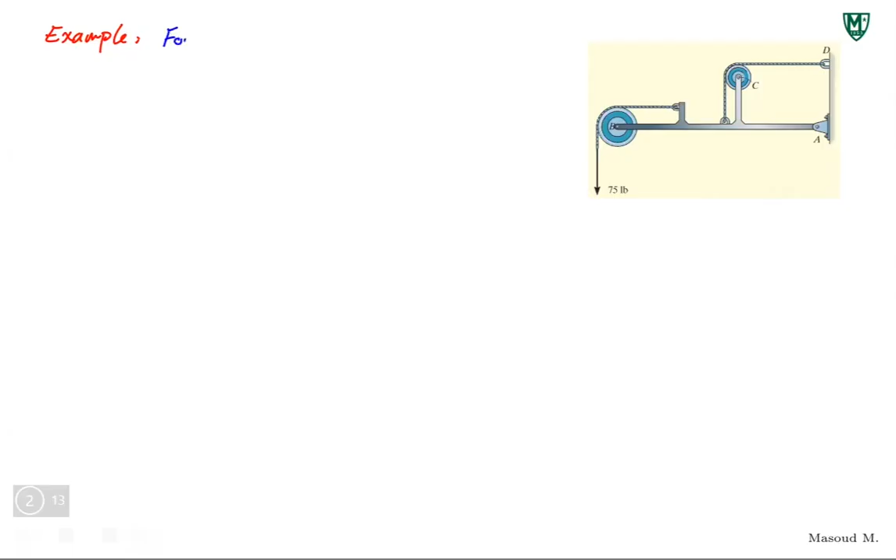We have a system of pulleys. We have two pulleys and a frame. It's generally a frame. Let me just write the problem statement. And I want to look at the free body diagrams for the whole system and each part separately. So let's just phrase it this way. For the frame, and it's not moving, so we can probably easily guess that's a frame and it's not a machine.

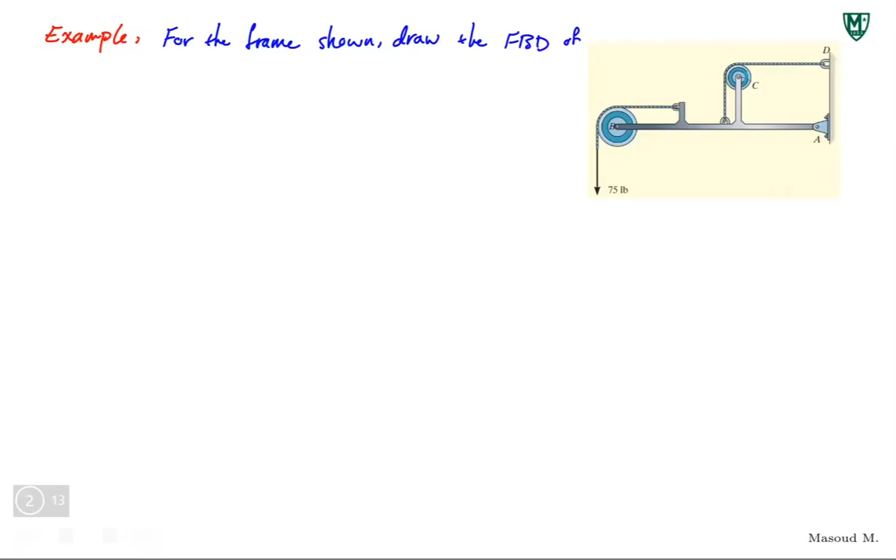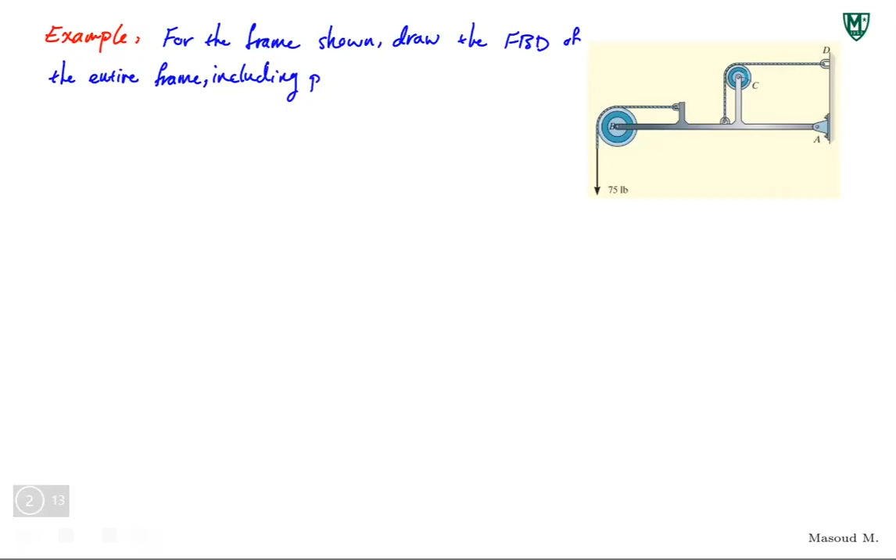Draw the free body diagram of the entire frame. So that's one thing to do. First, draw the free body diagram for the entire frame, which, let me write it fully, including pulleys and cords.

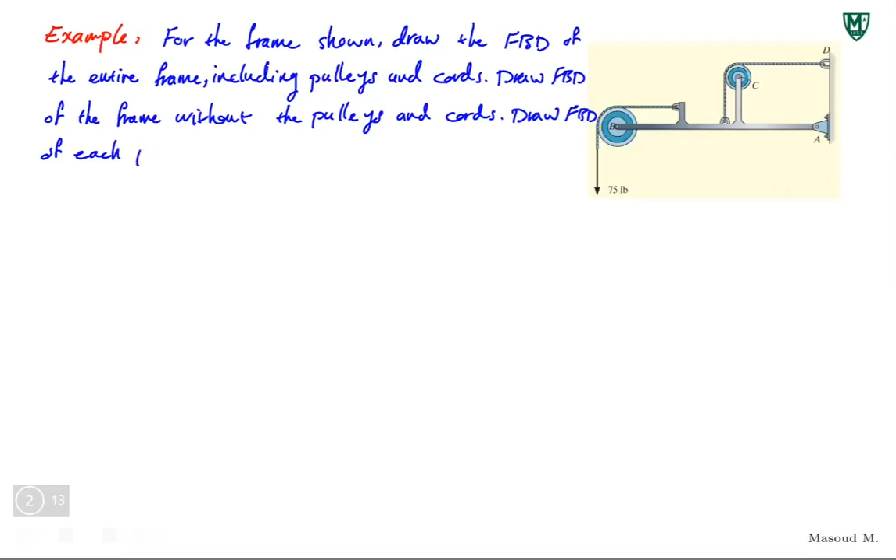Second thing is draw the free body diagram of the frame without, I think that's what it says, the pulleys and cords. Exclude those. And finally, draw the free body diagram of each pulley. Right. All right. To start from the first part, draw the free body diagram of the entire frame.

Let's draw it. I'll do my best. Let me do it here. So this is the frame. Let's say I have this one right there. I have this one right here. It includes everything. So let's just assume that this is the pulley as good as I can draw it. And that is not the pulley. Pulley is supposed to be here. There we go. And the other pulley there. I can move this one way or another, hopefully, or I can't, and I just move it this way. As much as I can do the trick. There you go. All right.

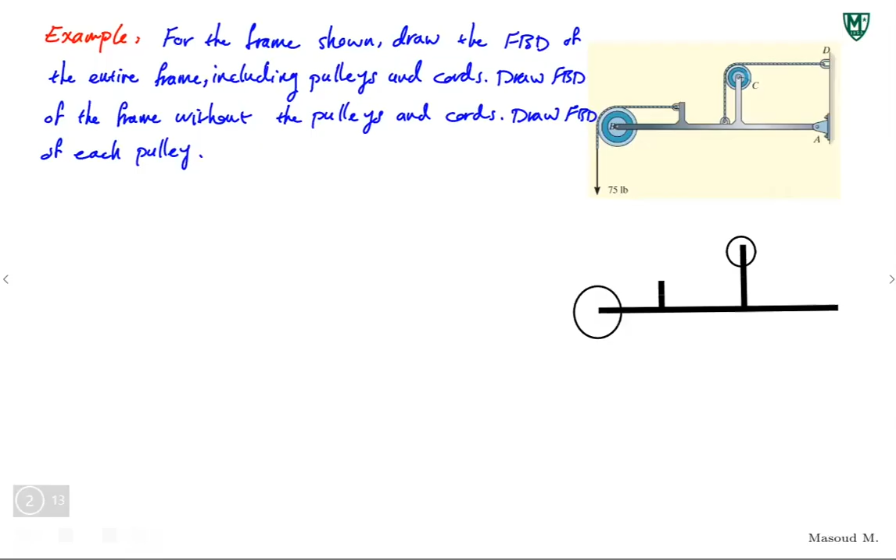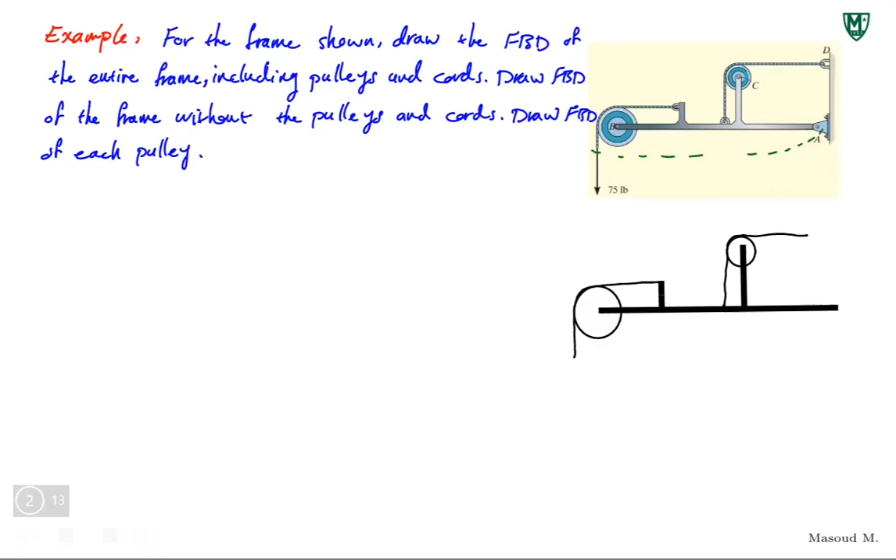All right, free body diagram for this, right? And we have the ropes there. So we're taking into account the whole system. So I'll draw it like this right there. And draw it like this. But keep in mind, I'm isolating the whole system. So whatever this line cuts has to be taken into account. All right. So what do we got there? We have the tension on this cord. We are given that it is 75. Let me use the proper color. 75 pounds.

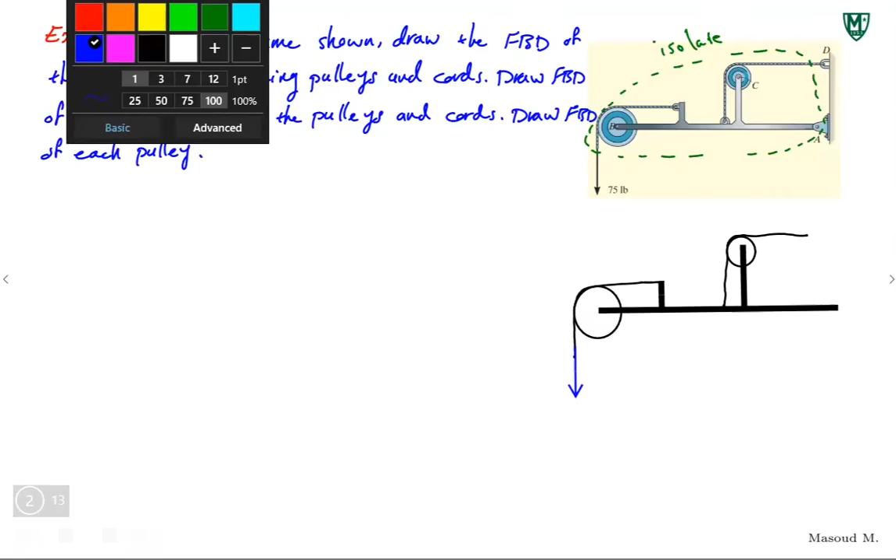What else do I have there? Can someone tell me at least one of the support reactions? Thank you, Colin. Exactly. We have support reactions there. And I'm just going to choose some arbitrary direction, just positive, since we don't know about these. That would be AX, and this would be AY. Anything else? Tension on rope attached. Exactly, Daniel. So we have the tension on the rope. There you go. And let's just call this TD. That's pretty much it. That's all the forces that I could see when I isolate the whole frame and draw the free body diagram. So this would be the free body diagram for the entire frame.

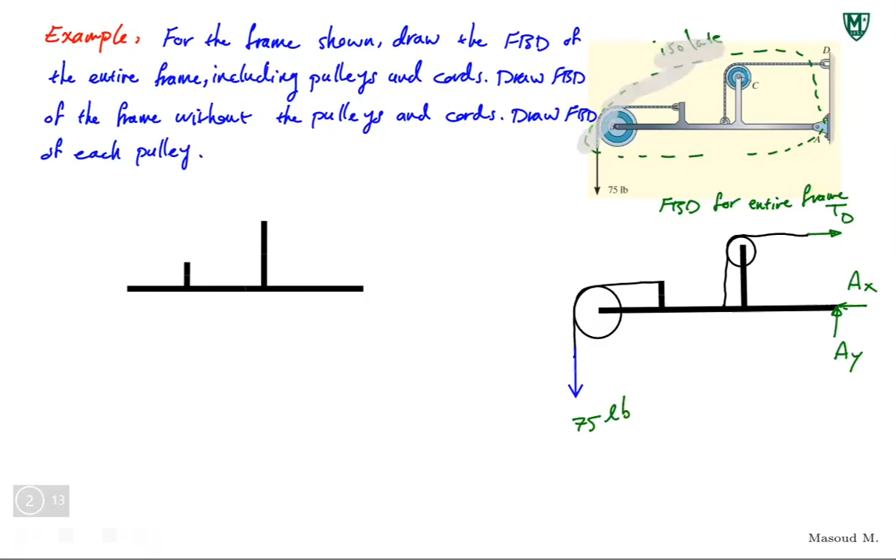Right. Let's go to the second part. So draw free body diagram of the frame without the pulleys and cords. All right. Let's see how does that work. I'm gonna draw the frame somewhere right here. Right, I have this one, and I have this one. All right, so now I'm looking at this frame. If you think about this frame composed of this metal part, that is the whole structure there attached to each other, this part, and this pulley there, and the other pulley here. Right? I'll take these pulleys apart, aside. I don't want them in my free body diagram. I want the free body diagram for just this green part of the frame. This structure that is basically welded and attached to the wall. So this is what we're isolating now.

Let me see if we can do it this way. This is what I'm isolating. All right. Now, what do we have there? Well, I already know that I have support reactions. That hasn't changed. So I'll just put them again here, AX, AY. Remember, this is a frame, so I can dismantle all the parts and look at the free body diagram of each part separately. And each part should be in equilibrium. Later on, we'll see how you can use it. But in this particular problem, I'm just interested in knowing the free body diagram of different parts. And in this part of the problem, the free body diagram of this green frame. So I have the support reactions at point A.

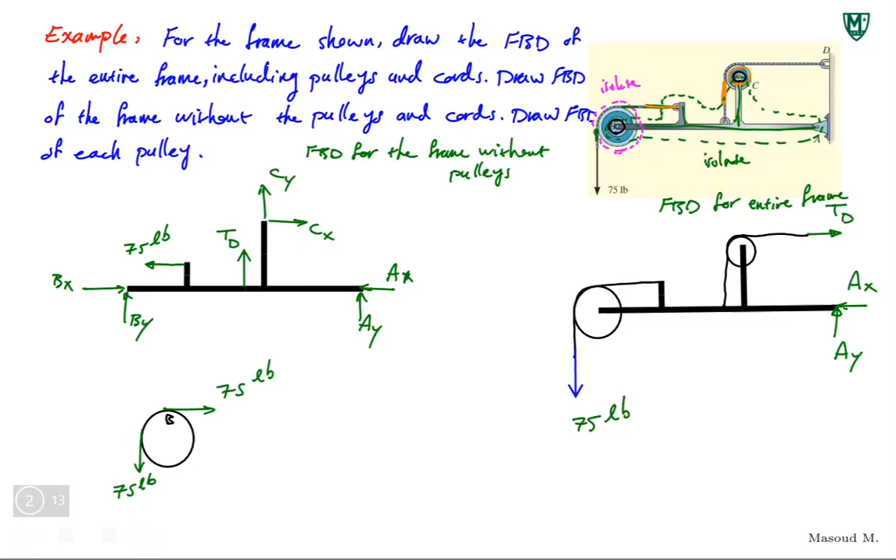If I do that, I'm taking it out. Right? Well, obviously, the rope is there. Pay attention, the rope is cut in two parts, here and here. So both of them have to be taken into account. Downwards, yes, exactly. One downward, 75 pounds, and one in this direction, 75 pounds. Because I'm isolating just the pulley, so whatever that line goes through and I cut through it, it has to be presented on my free body diagram.

Another thing is point B, right? Before I took this pulley out and I looked at the frame, now I'm going to put this pulley out and I just look at the pulley itself. Now, since it's at point B and I already put BX and BY on the frame, remember, these are internal forces. So exactly like what we were dealing with in truss structure, but it's a little more complicated here. That was the simplified version.

Internal forces. So whatever force is applied by the pulley to the rest of the frame should be equal and opposite in direction of the forces that are applied from the frame to the pulley. Right? It's Newton's third law. This is in static equilibrium. It's standing right there. Pulley is not just moving around by itself. It's connected. So whatever force the pulley applies to the frame should be equal to the force that the frame applies to the pulley in opposite direction. And they cancel each other, because the frame and pulley are just standing there.

Newton's third law. So if I want to put the forces on point B, I'll do the same force but in opposite direction. Now this would be Bx, considered opposite in direction to the one on that structure. In this pulley, I'll put it along the same line of action, same magnitude, opposite direction. Same story with By. On that part of the frame, I put it upward, positive. Same line of action, same magnitude, opposite direction on the pulley. Right? Newton's third law. That's why we write it down.

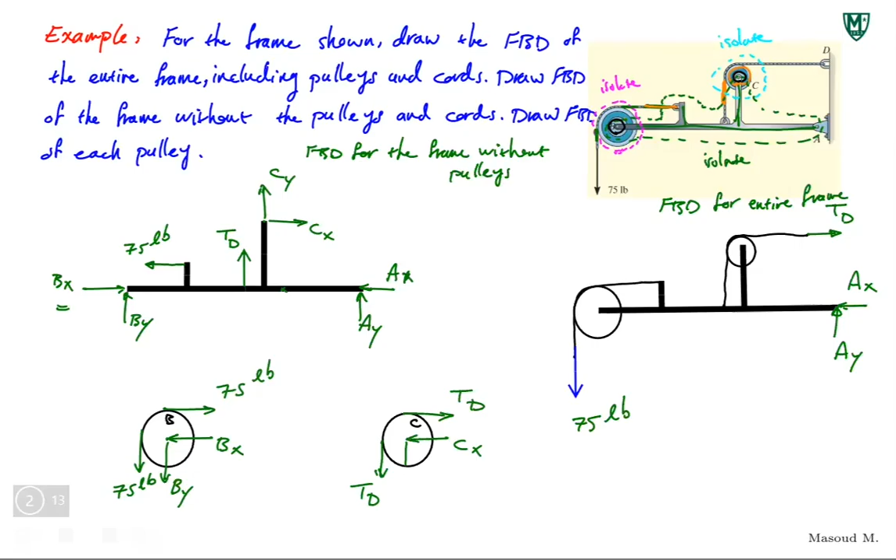Now C, the same story. CX is to the right on this structure, so I'll put it in the opposite direction here. CX. Remember, the magnitude is the same, so that's why I'm using CX. It shows the magnitude, but the direction is opposite. Newton's third law tells me that these two are interacting. If this one applies the force CX, the other one should apply force CX to this one in the opposite direction. Same story, CY is upward, so on this it should be downward. Right?